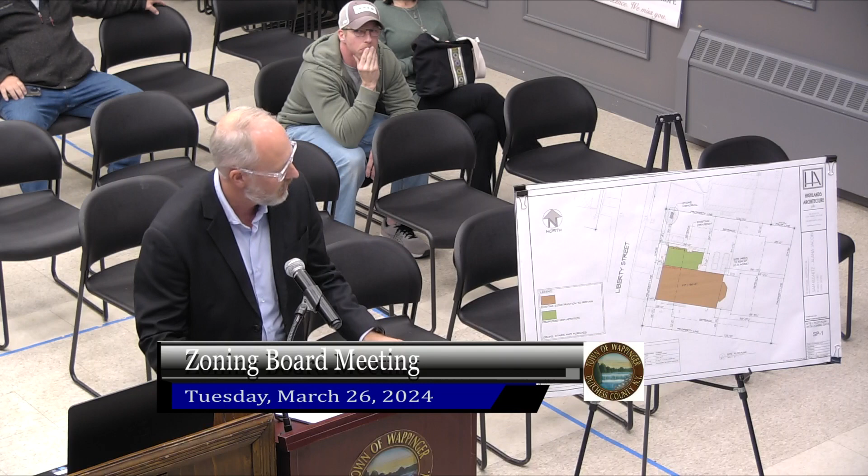Yes, we're here. We've designed a residential addition. It's 575 square feet. Part of that addition is placed in the front yard setback.

Just a correction too, it's 10 Liberty Street. I think 17 was noted, but it should be 10 Liberty Street. I think that's what Mr. Galati had mentioned, 17. This is 10. Yeah, it's 10. Okay, a variance of 17 feet, 5 3/4 inches, I think it projects into the front yard.

So, yeah, as we were planning and looking for the best place for the addition, we thought that was the best place. And thank you all for coming out on Saturday for that wet and cold, rainy morning, where we marked out the footprint of the addition, showed where the property line was, where the setback line is, and you can see pretty clearly where that addition's going to go.

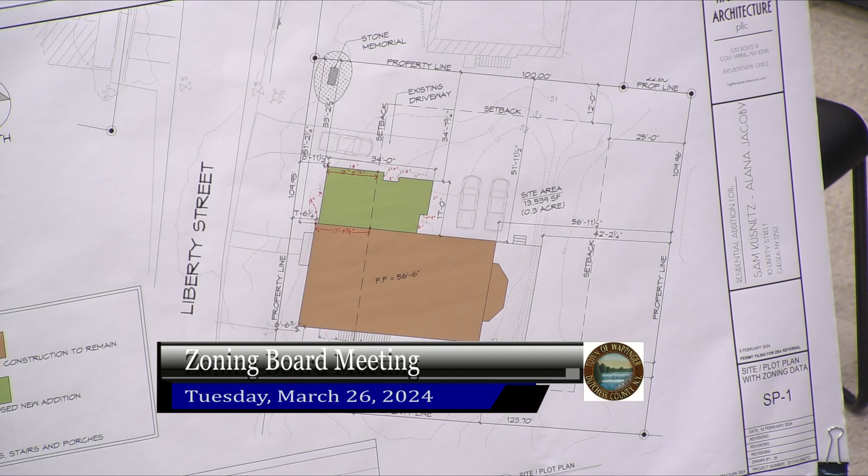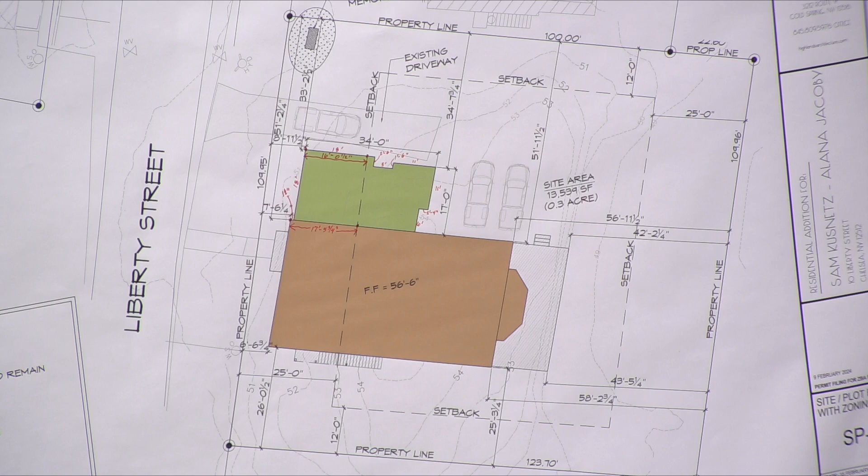We may need to make a very slight adjustment to the driveway. I think you could see there when we marked it out that the back corner where the lounge is, we might need to bend that driveway out a little bit, but that's not going to affect anything as far as placing the driveway on the site, just scooching it over a little bit, because when we excavate for the foundation, part of that driveway is going to get torn up, and they're still going to be parking where they park now, so that's not going to change. We just want to protect that corner of the new addition, and we think maybe a very slight adjustment to the driveway will be required.

They can do that at the building, when they get the building permit, so it won't affect your variance. Okay, and we'll be showing that on the site plan when we submit for filing for the building permit. Yeah.

As I've explained prior, the hip roofs, the little cupolas, the Gothic arches with the windows match the existing structure. We feel it's very complementary to the existing architecture. We think it'd be a welcome addition to the neighborhood. We're very respectful of the neighborhood. It's a very quiet, beautiful neighborhood, and we want to keep it that way. This is why we've placed it there and designed it the way we have.

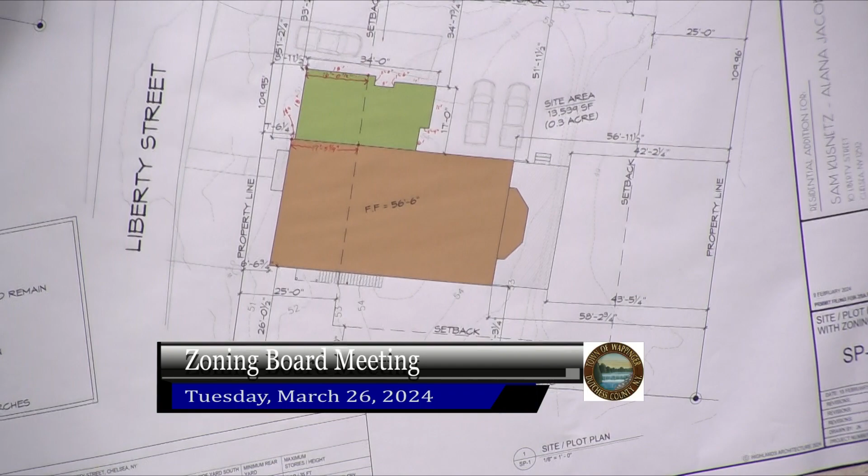Seeing the site plan there, and just the front elevation, for example, is showing what it will look like from the front, from the street side, and from the driveway side. So everyone can hopefully see that.

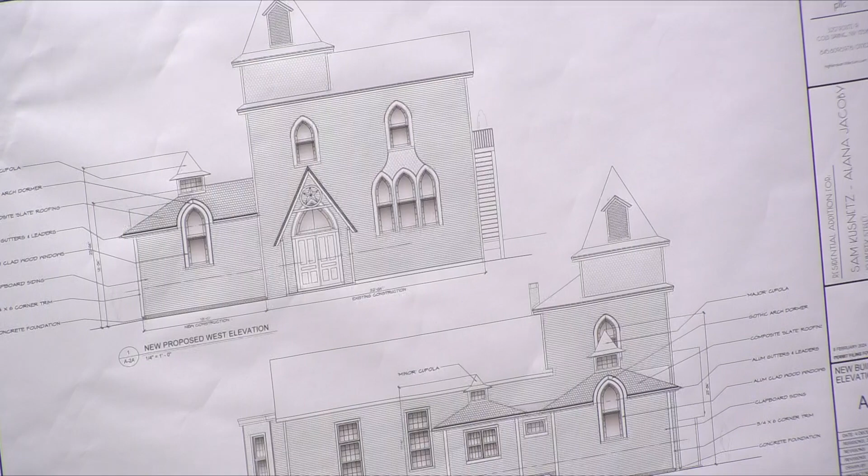I think that's about all I have, really, on the project, and I'm glad you were all able to come out there and see this on Saturday. Yeah, we were all out there, did the site visit and saw what you've got going on.

You did a great job demarking everything and the basic footprint of the addition. Gives you a pretty good idea where it is and how it lays out in relation to the adjacent property.

Which is a firehouse. On that side, the side of the addition is where the firehouse is, right? Yes. And we did note when we were out there how close the property line is to the firehouse. That's correct.

And I think the architecture is great. I think it blends in well with the existing building. You have a very similar structure right across the street.

Do you guys have any other questions for the applicant? Yeah, I mean, just a comment, I agree. I don't think any other structure on that strip there meets any of the setbacks. It's a historic area, and setbacks were added later. I think the addition he's doing is sensitive to the existing architecture, and there's really no other location on that site to put it that wouldn't be detrimental to the building as a whole. I think what you're proposing makes sense.

Thank you. I had a question. I know we didn't have a good chance to talk Saturday. We had discussed the rear of the church, because I'm looking at number 3. Is there another feasible location available? And I think we talked about the rear of the church, that there was a deck there, but was there a septic system back there?

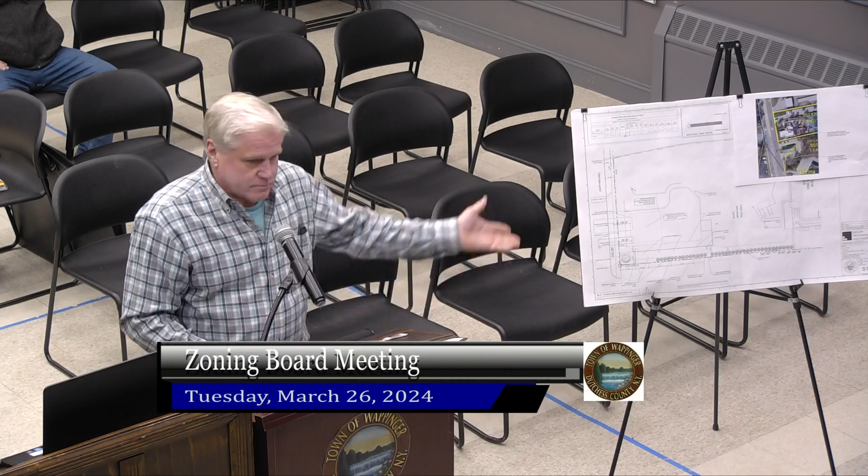For the record, please state who you are. I'm Ray VanVoorhis. I'm Dan Pizzarelli, the owner's architect. I was just going to give you a brief rundown on the project, if you'd like. Yeah, absolutely. And Dan's here to answer questions as well. Thank you for talking to us tonight.

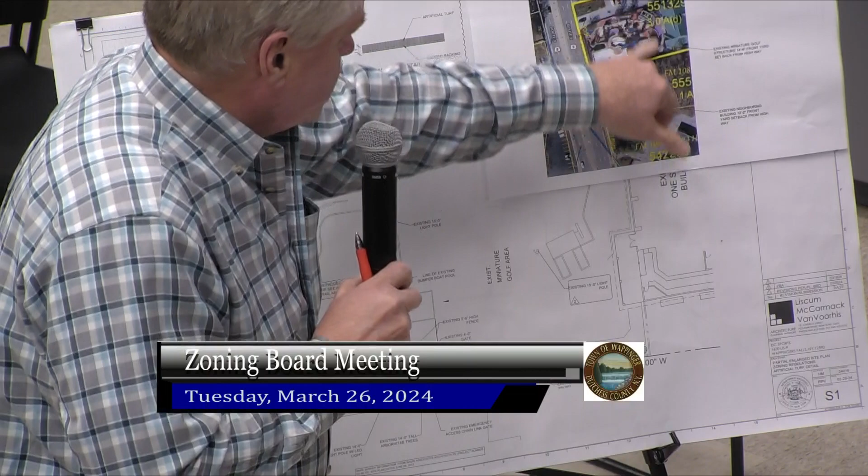You have everything you see here in the package as well. I just wanted to point out a few things. This is the Route 9 site itself, the old Fun Central, as everyone knows it, which has been there for about 30 years with the bumper boats and the miniature golf. The building itself is way back from the property line. But there are some structures here, and what they're looking to do is put in a ropes aerial course, which is really a transparent structure—you could call it a large playground. There's no roof, there's no sides, it's just poles.

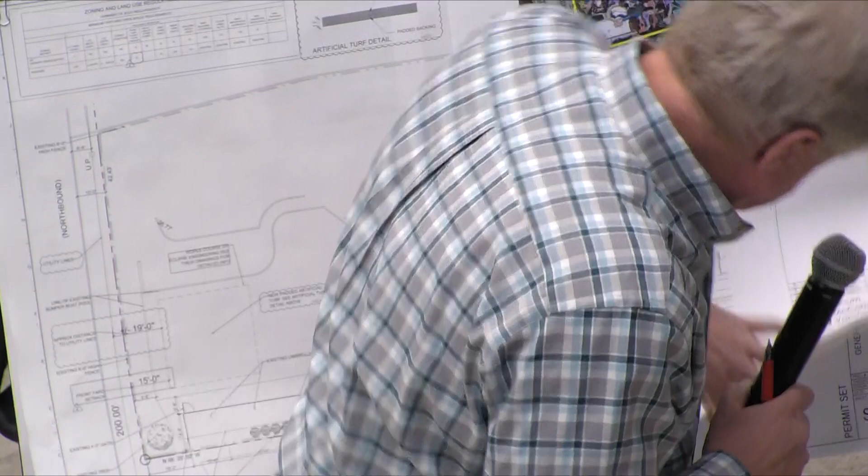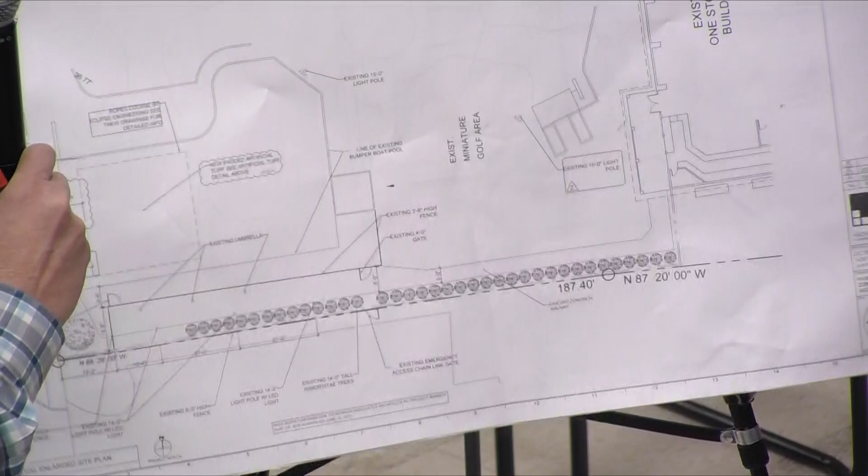You can see it here in your package, but I wanted to show you this as well—it's a transparent structure that goes through. The idea is that it's going to be right in the bumper boat pool itself. The issue the planning board had is that it's considered a structure because it has footings. However, the existing pool itself, which is a structure by zoning law and the town of Wappinger's code, is only 9 feet 8 inches from the property line. That's been there for at least 30, 40 years. We're actually going to be 15 feet back to that pole structure I just showed you.

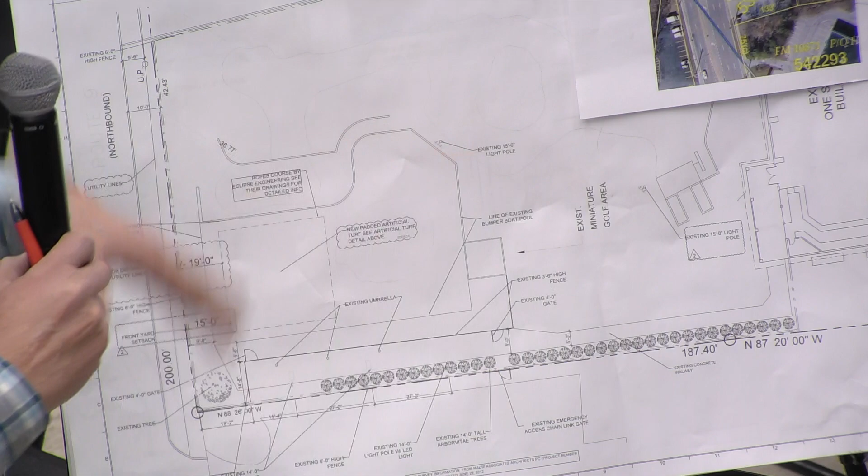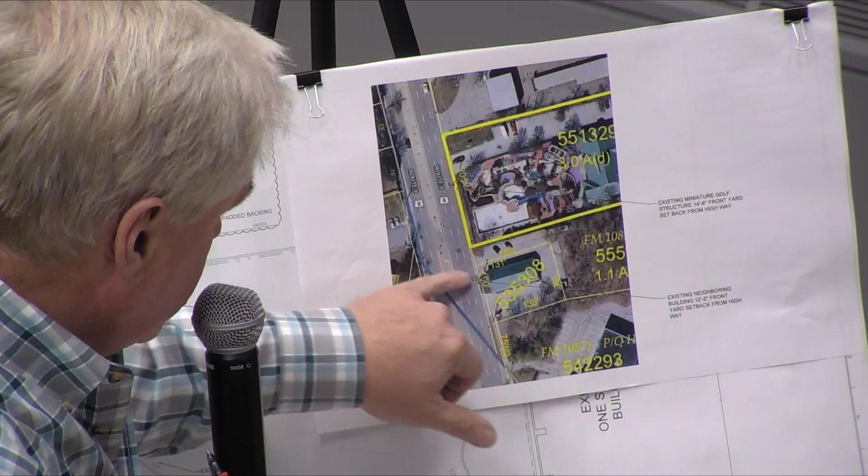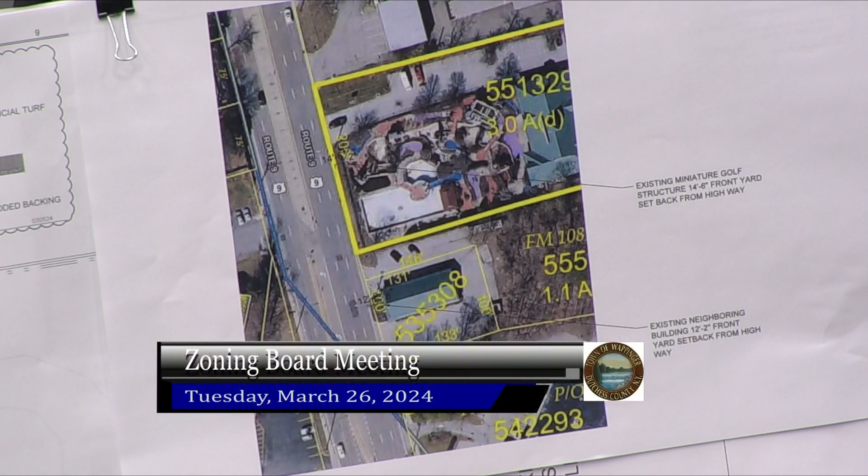Another couple of points of reference: there's the castle, which is pretty tall—about 30 feet—small, but tall, and that's about 14 feet from the property line. It's been there for 30 years. The tanning salon building itself, in the same district, is only 12 feet off the property line as well. So we're non-conforming, and I feel, as an architect, that we're not increasing the non-conformity because it's a transparent structure, and it's not as close as the pool and the other buildings adjacent on the north and south of it. That's our point in a nutshell.

We've been going to the planning board for a few weeks talking about other issues. We're kind of down to this, and they're coming next Monday night to look at some of the lighting issues, like turning the lights down along the property lines and stuff like that.

What is the overall height? 30 feet—so we're within the guidelines of the code for that, 30 feet above grade. And the 34 feet, is that basically to the bottom of the pool? Yes, the pool is about 4 feet. 35 feet is allowed by code, above grade, so we're still 5 feet under. Either way you look at it, we're less. So this is basically going into the pool, correct.

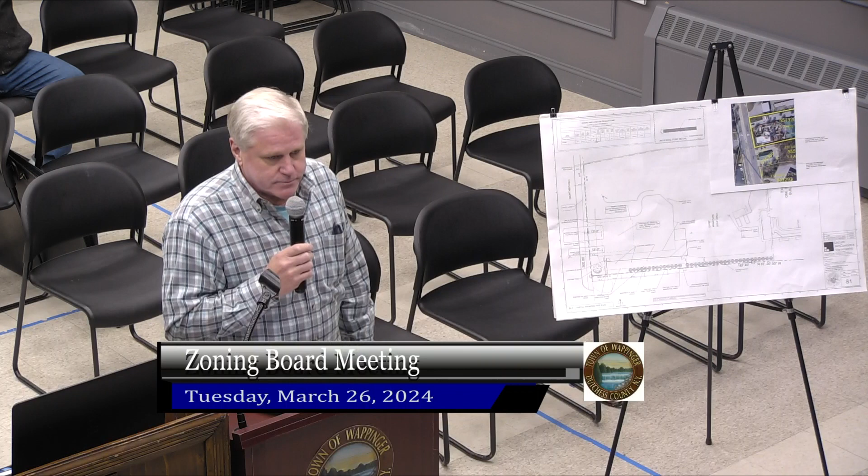There's another technical reason why we can't push it back any further. There's an island here, which is part of the miniature golf course, and there's also an underground drainage ditch that we have to straddle with the structure. So we've looked at other places to put it, and that's really the best we can do.

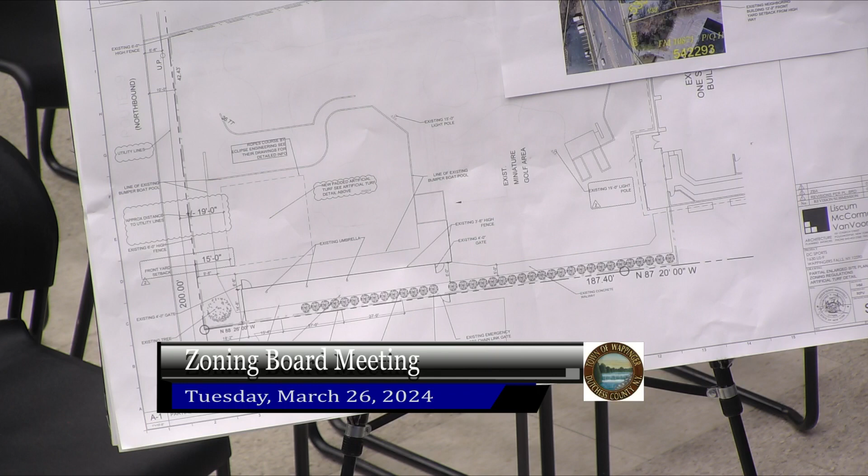Can I just look at one thing? I have a question, Jim. Sure. How in the first place did the original pool get so close? Was there a 75 foot requirement? I believe there was. Barbara and I were speaking about that, and I went through the files, but those files couldn't be located—they're probably in another storage area. Barbara and I spoke about it, and she believes there was a variance for that.

So we're not closer than that variance, we're actually another 5, 6 feet back from that. It's amazing to me the pool was there in the first place. And the building, we love our neighbor, but the tanning salon is 12 feet off of the property line. Same property, Reddle owns all these properties.

Platforms, and that fence is here. Just out of curiosity, the rope course, is that like what's in the Palisades Mall, that type of thing? Yeah, very similar. This is six foot. A licensed professional designed it and stamped it. They're all belayed, I think that's the right word. They don't swing like a trapeze, they just go up and down vertically, very safe. That platform is here, you know what I mean?

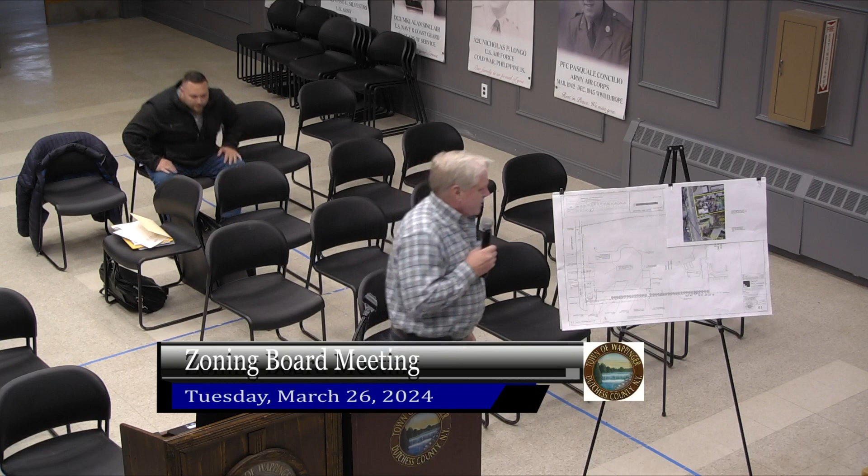Do you have any portion of the structure mocked up on site that we're gonna be able to see, like in terms of the height? No, you really can't. Do you know how tall that castle is? It's pretty tall, I don't have the exact height of the structure.

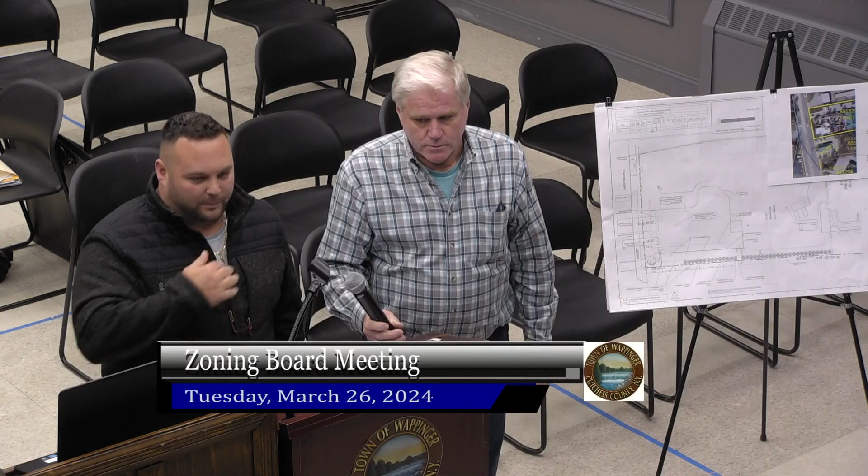On the structure itself, I did spray paint in the pool where the structure is gonna be, in the pool itself. So we'll be able to see the front wall of where the posts start, basically in the pool. You're gonna see the concrete structure of the pool, and then you're gonna see spray paint marks of where the pillars are gonna go. There's nothing in the pool there currently, it's just open, no water, everything's empty, it's just a concrete shell. Basically you can see the footprint there, it's just a depression like a pool. So there's nothing there, there's no structure there, but the poles actually connect there and they go up.

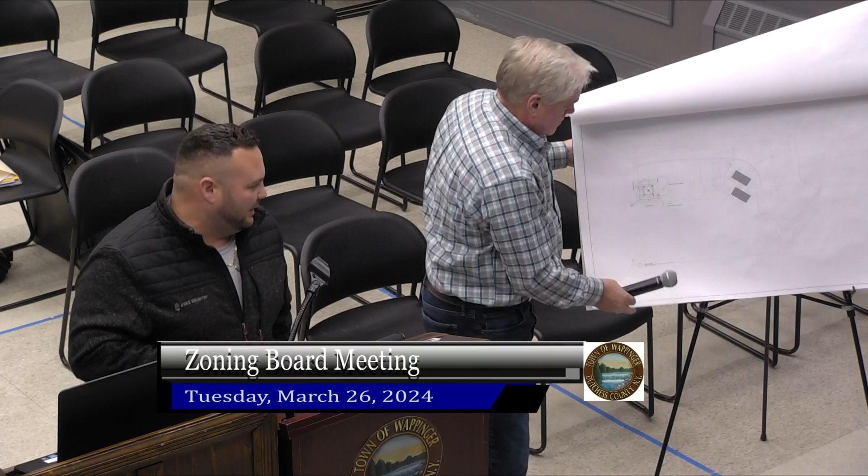I feel like the height is a concern here. With that cell phone tower, they basically did a small balloon, I don't know how high it was, just to give the height. I don't know if that would be possible. The planning board said the maximum height was 40 feet, I think, or something. I believe it's 35 feet and we're 30. Just considering the aesthetics also of where that wall is sitting in relationship to the road. I don't know if it'd be possible to go down to Party City and get a helium balloon with 30 feet of line and attach it.

What he's asking, Dan, is can you put, there is no wall, we can't build a wall, it won't be a wall when it's done. Yeah, but what he's saying is, can you put a balloon at that point that goes up 30 feet from the grade to represent the top height of these poles? I don't see why not, you could make a string 35 foot tied to the balloon. I think we'd have to do it on a non-rainy day, but I think that'd be useful just to see the sight lines up and down the road, that's something we're gonna wanna look at. I'm sure we could figure that out.

Why not? I thought, how deep is the pool? Pool's about 4 feet. So you're gonna be basically 4 feet of the structure below grade, right? And the rest of it, so 30 feet above grade, so it'd be a 34-foot rope. I could probably string, get a measurement of the castle as well. The castle's pretty high, yeah that's what I was gonna say. When you go to the site, it's right in this corner, it exists, we can measure that. I think that's close to 25, 30 feet tall.

I'm just thinking of a balloon with an orange flag even, just some orange tape or something, so when we go down the road either way you can look towards the site and see what the visibility is. He wants the top of the flag thing so you can see when you're coming down Route 9, how high 30 feet from the grade would be on top of that flag. So take a flag, well I don't know how you could get a flag, the flag's not gonna have helium in it. So maybe a red or orange balloon.

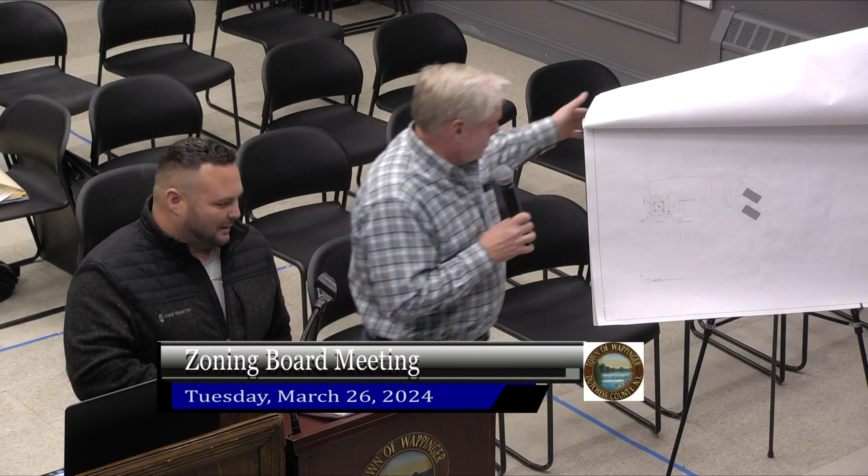But I think the point you really need to remember is this is a really transparent structure. There's no walls, so there's no need for safety netting. You're always tied in - the belay system is a magnetic system itself.

You can't undo it without magnetics. You're harnessed in, you have a helmet on and everything. They go to the platforms, and then they get lowered down to the lower level. There's 8 obstacles on each level, 2 levels.

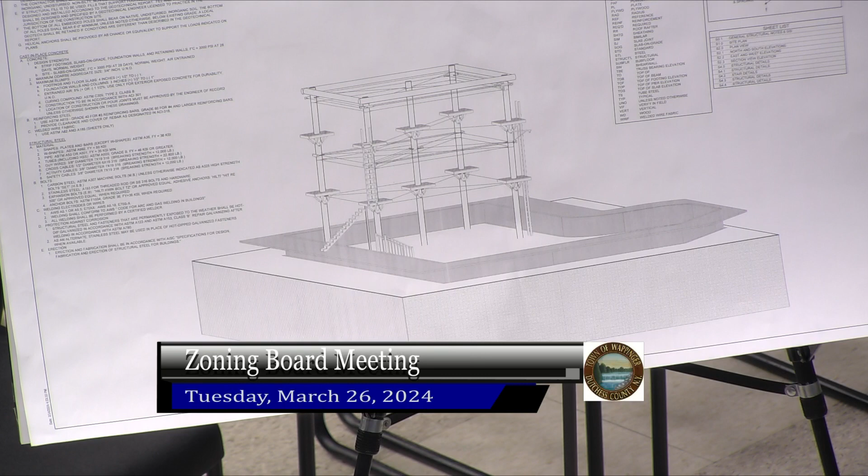Where do you get harnessed in? Before you even get onto the structure. On the concrete pathway, like going onto the bumper boats right now, there's a gate, a black gate.

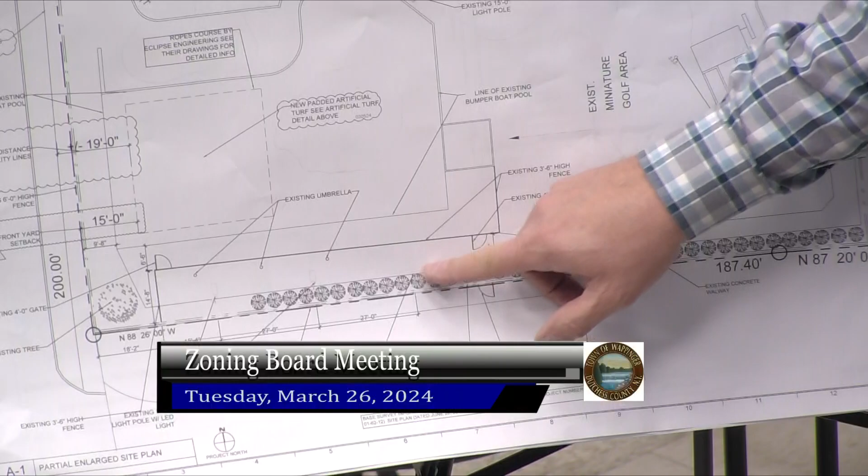Nobody's gonna be allowed in that gate, it's fenced in. This area is fenced in, you're gonna come down here and wait to get in, and then come in. There's a ladder up, and there'll be a lock before you even get on it, and the ladder that goes on the ropes course goes up, and it'll be secured at all times when we're not using it.

Do you have any photos of similar systems that you'd be able to supply us with? I'm sure we can get that. Yeah, I think that'd be helpful, just to get a sense of what it's actually gonna look like.

At dusk as well - keep that in mind. Because again, we do consider the visual impact of this from the road, and knowing what it looks like would be helpful. Sure, and we close at dusk.

Can I approach you guys? Sure, sure.

And you're totally strapped in before you even get into this. You're not even coming close to getting on that course without being strapped in. Everyone that's on it is. So you're strapped in first, and then you walk down, and then the belay system goes on, and then you come down into the fenced area to go up to the structure.

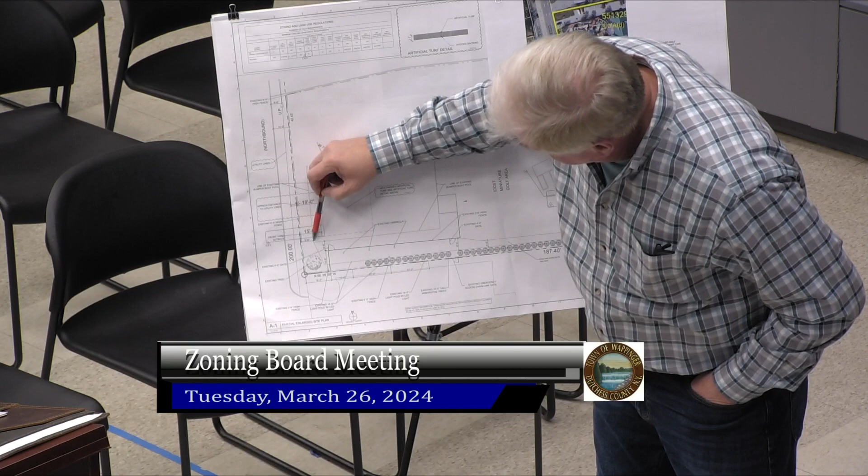You'll see all that. Again, there's no swaying of any part. You walk up on the course and you're doing the event, if you do fall off, you're on the belay system, you just get your feet back on it and keep going. On the way down there's gonna be ladders, and in the structure itself when you get down, you're unhooked from the belay system, and you walk right up the steps.

And there's more detailed drawings in your package there, unless you want to look further about the stairs going up and the stairs going out.

We were just thinking of a new idea. The bumper boats are a dead concept, the pool's leaking, and the upkeep is crazy.

So something different, very popular with the kids. There's golf back there too, isn't there? There's mini golf and sand volleyball. Mini golf inside and outside, and inside it's simulators and miniature golf. Simulators and volleyball inside, with miniature golf outside.

Got it. And cornhole tournaments, cornhole's huge on Friday nights. It's crazy, I'm not gonna lie.

There's a tiki bar as well. But no signs and wrappings on the ground, only on top. I didn't put those, I'll take them all off. All right, thank you.

Side note, I already yelled at the guy. Believe me, I said you got me in trouble now. But we're plugging your cornhole, aren't we? All right, I appreciate that.

All right, so we're good, right? So we got you on site visit on the 6th, public hearing on the 9th. And we'll see you on the 6th. B, I'll have a sign for you, you're gonna have to stick that out in front. That's fine. Do we do the mailings again, just like we did before? Okay. And that's right there in that packet for me? Yeah. All right, awesome.